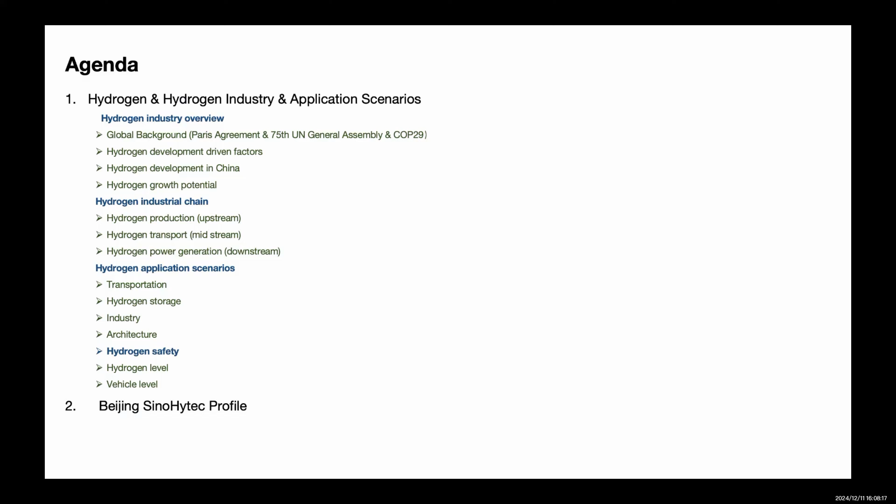In the third part, we will talk about hydrogen application scenarios, from transportation to hydrogen storage, from industry applications to architecture sector applications. Then we will focus on hydrogen safety at the hydrogen level as well as the vehicle level. And next, we will have a brief introduction of our company, Beijing SinoHytec.

So first, let's have an overview of the hydrogen industry. As we all know, it has been a global consensus that 35 countries and regions have issued hydrogen energy development roadmaps and actively support the hydrogen energy and fuel cell industry. For example, China rolled out the medium and long-term plan for the development of the hydrogen industry in 2022.

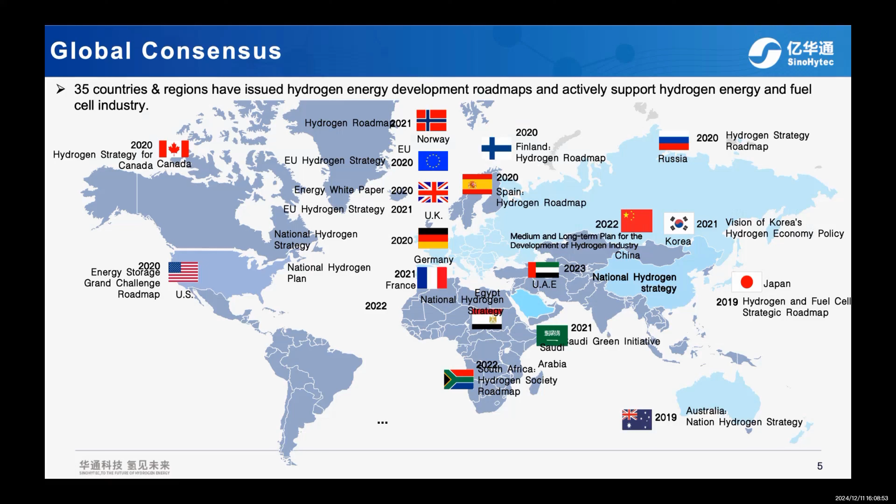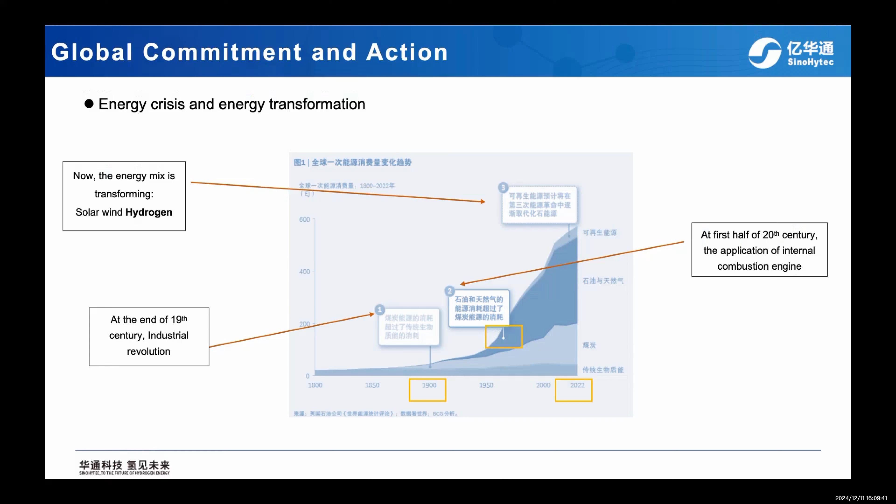We want to use more renewable energies like solar, wind, and hydrogen. Because of zero carbon emission and carbon neutrality policy, we must control temperature increase within 2 degrees Celsius compared to pre-industrial levels. If we continue at the current carbon emission level, it will surpass that, and the temperature increase will reach 2.6 to 3 degrees Celsius. If we follow the map set by the Paris Agreement, we can control the temperature increase within 2 degrees, below the red line.

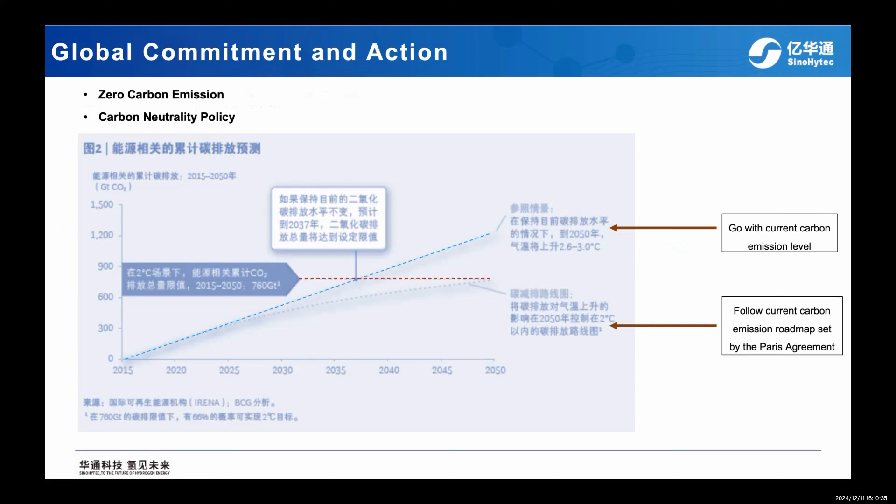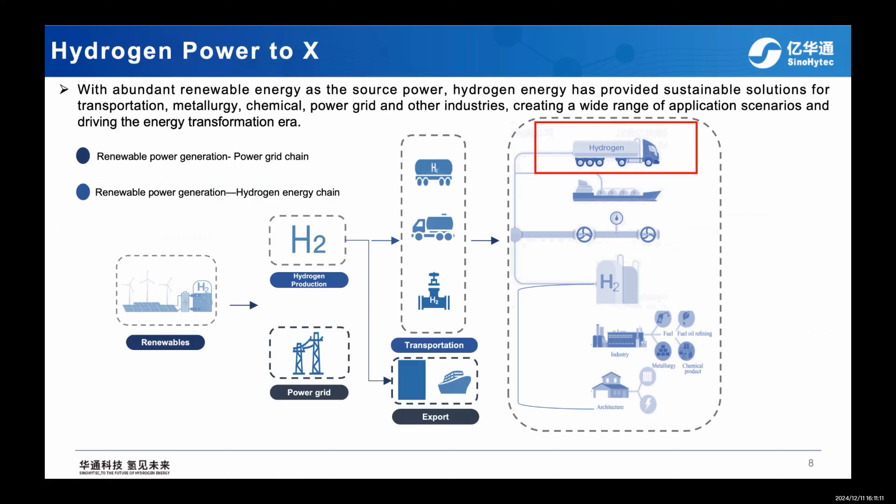So why hydrogen? Because hydrogen is power to X. With abundant renewable energy as the source power, hydrogen energy has provided sustainable solutions for transportation, metallurgy, chemical, power grid, and other industries, creating a wide range of application scenarios and driving the energy transformation era. We use hydrogen to power the power grid and also to power the transportation industry.

Also, from the market potential perspective, we can see from this picture that by 2050 the application of hydrogen will increase to 10 to 15%, and the mainly used sector is the industry sector.

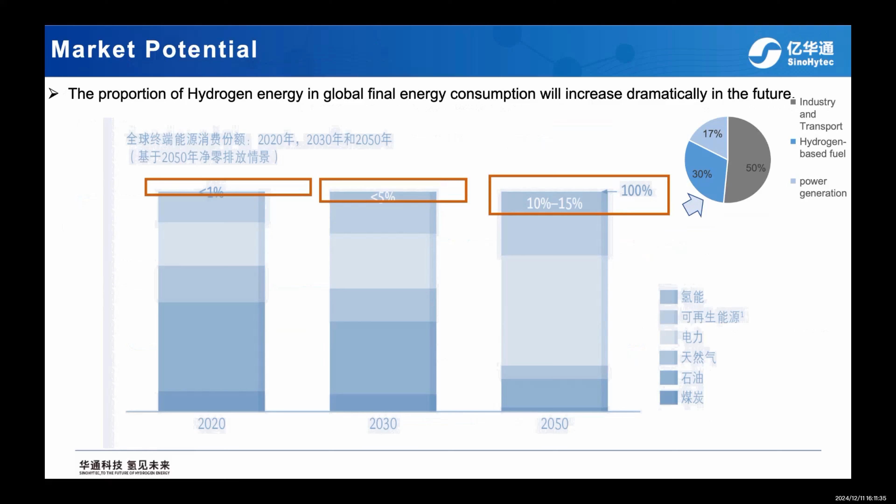So how about hydrogen development in China? There are several reasons that contributed to the quick development of hydrogen in China. The first is the favorable environment, because China is a large hydrogen producer and consumer. It's predicted that by 2030, hydrogen demand in China will reach 35 million tons, and by 2050 that figure will reach 60 million tons. The annual hydrogen production in China accounts for one-third of the world's total.

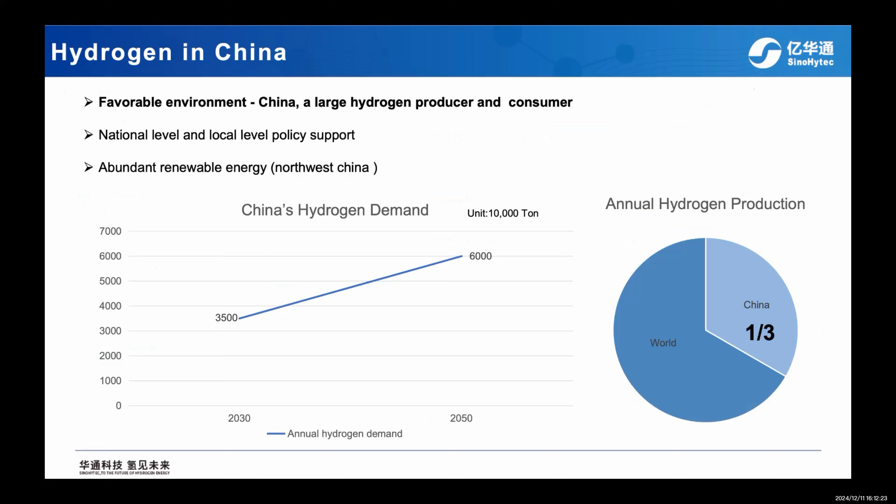The next reason is national and local level policy support. As mentioned, China rolled out the medium and long-term plan for the development of the hydrogen energy industry from 2021 to 2035. It states that by 2025, the number of fuel cell electric vehicles will be about 50,000. The amount of hydrogen produced from renewable energy will reach 100,000 to 200,000 tons per year, and CO2 reduction will reach 1 million to 2 million tons per year.

By 2030, a relatively complete hydrogen energy technological innovation system and clean energy hydrogen production and supply system will be established. By 2035, a hydrogen energy industry system covering transportation, energy storage, industry, and other fields will be in place, and the proportion of hydrogen production from renewable energy in final energy consumption will have increased significantly.

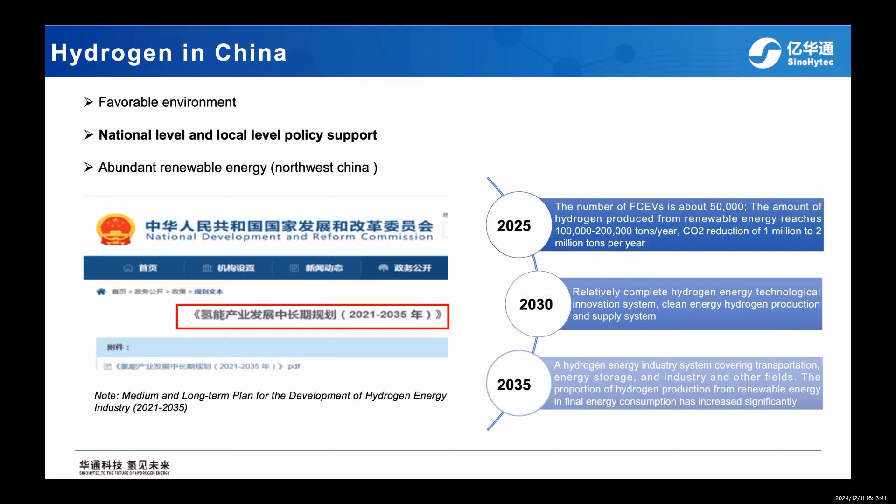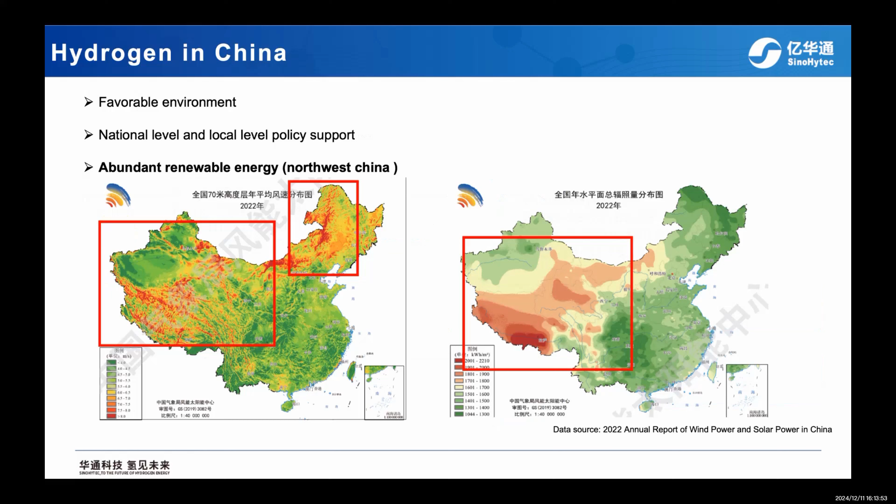The last reason is abundant renewable energy. From this picture, you can see that in northwest China there is abundant solar and wind energy. Next, we will focus on the hydrogen industrial chain.

For hydrogen production, we know there are 3 types of hydrogen: green hydrogen, blue hydrogen, and grey hydrogen. Grey hydrogen is mainly produced using oil, natural gas, fossil fuels, or coal. Blue hydrogen uses carbon capture technology, while green hydrogen uses renewable energies like solar and wind to produce hydrogen.

Data from 2020 shows that in China, the main source of hydrogen production is still coal, while in the world it is still natural gas. But it is predicted that water electrolysis will increase to 60%, and natural gas with carbon capture, utilization, and storage technology will increase to 40% by 2050.

Except for coal and natural gas hydrogen production, there is also coke oven gas hydrogen production and chlor-alkali to hydrogen production. These are all grey hydrogen. So far, fossil fuel-based hydrogen production is still the mainstream in China, while water electrolysis stands as a promising industry for the future.

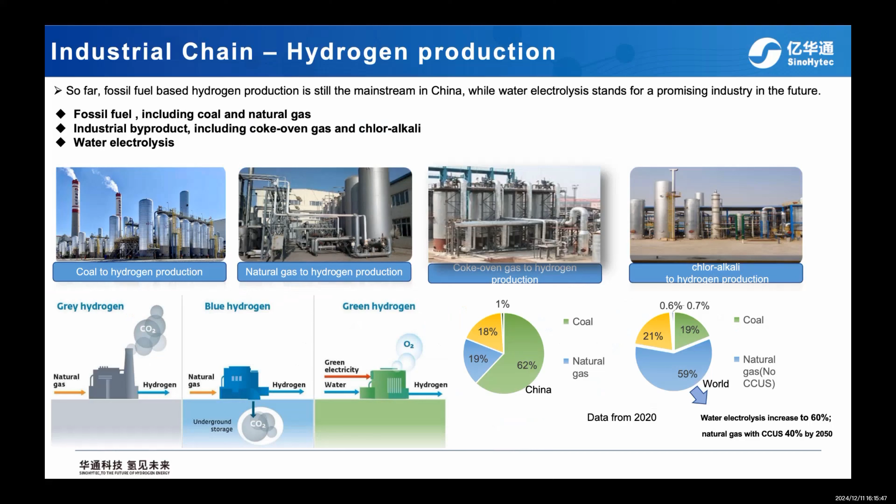There are several ways of hydrogen production. Alkaline water electrolysis is a more developed technology, low cost, and large scale application, but it still needs stable power supply. PEM water electrolysis has flexible operation, small size, high output pressure, and uses renewable energy. But its disadvantages are that it uses precious metal as the catalyst and is also limited by the supply chain.

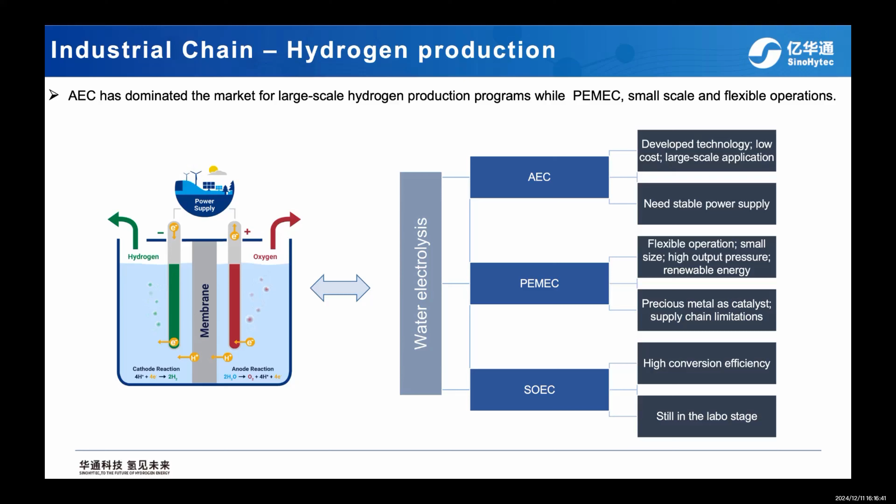And for SOEC, it has a high conversion efficiency, but is still in the lab stage.

For hydrogen transportation, there are mainly three types: long tube trailers, pipelines, and tank vehicles. Based on different status and hydrogen delivery ways, there are several types of hydrogen, like gaseous hydrogen at 35 megapascal or 70 megapascal.

The pros are it is quite a developed and efficient technology, has lower cost, and is very easy to operate. But the cons are it's very flammable with safety concerns, has high requirements for hydrogen refueling, operation, and the surrounding environment, and also has hydrogen storage intensity issues.

For liquid hydrogen, it has to be cooled to temperatures below minus 253 Celsius degrees, and is mainly used in the aerospace sector. The cons are it's very dangerous to handle, requires strict storage conditions, and uses higher energy consumption.

For methanol and NH3, it has low conversion efficiency, is toxic, and has higher energy demand. For LOHC, it has high energy storage density, easy transport, but has gas impurities, difficult dehydrogenation, requires catalyst, and has a high working temperature.

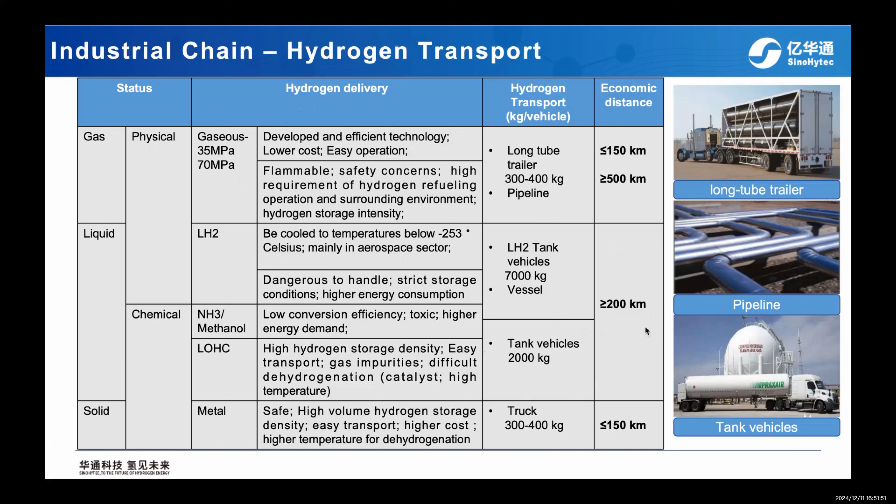Based on different types of hydrogen, there are different transport ways. Gases use long tube trailers, with economic distance less than 150 kilometers. Pipelines have economic distance more than 500 kilometers. Tank vessels for liquid transportation can carry 7,000 kilograms, with economic distance more than 200 kilometers. For the metal one, the economic distance is less than 150 kilometers.

Next, hydrogen to power. Globally, SOFC and PAFC have been widely applied, while in China, PEM fuel cells with quick startup have been widely used in small-scale distributed home-based scenarios, and have been improved from kilowatt level to megawatt level development. The comparison can be seen as follows.

We can see the advantages of PEM fuel cell are that the working temperature is much lower, from 80 to 100 Celsius degrees, and the startup time is much lower than others, less than 1 minute. From the application scenarios, the PEM fuel cell can be primarily used in passenger vehicles and commercial vehicles.

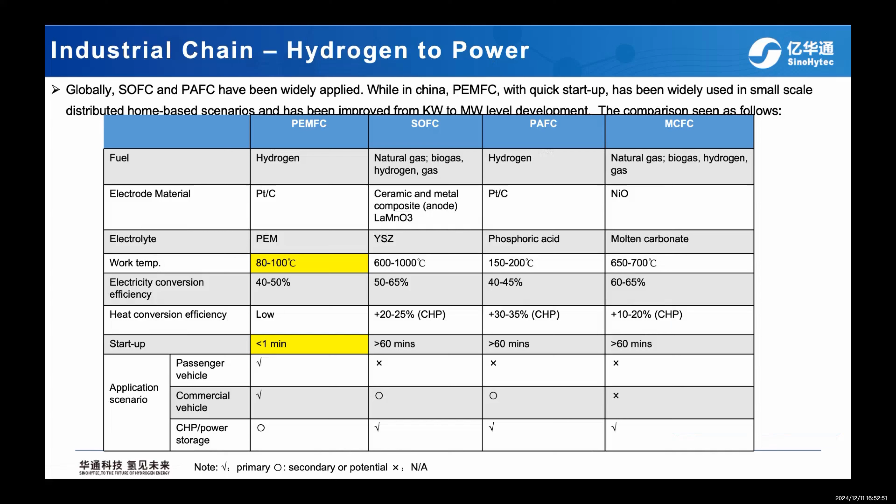There is a summary of the pros and cons. For the PEM fuel cell, the pros are it has high power intensity, light and small size, long service life, and quick cold start. The cons are it's difficult to process and needs special fuel.

For the SOFC, the pros are it has high conversion efficiency, no precious metal catalyst, and fuel compatibility. The cons are it has high temperature, easy corrosion, and low startup with short service life.

For the PAFC, it's a quite developed technology that has entered the commercial stage, with fuel impurity tolerance. The cons are it has large size, lower efficiency, short service life with strong corrosion of electrolytes, and needs precious metal as catalyst. For the MCFC, the pros are high efficiency and fuel compatibility, but the cons are high working temperature, corrosion of electrolytes, and low startup with short service life.

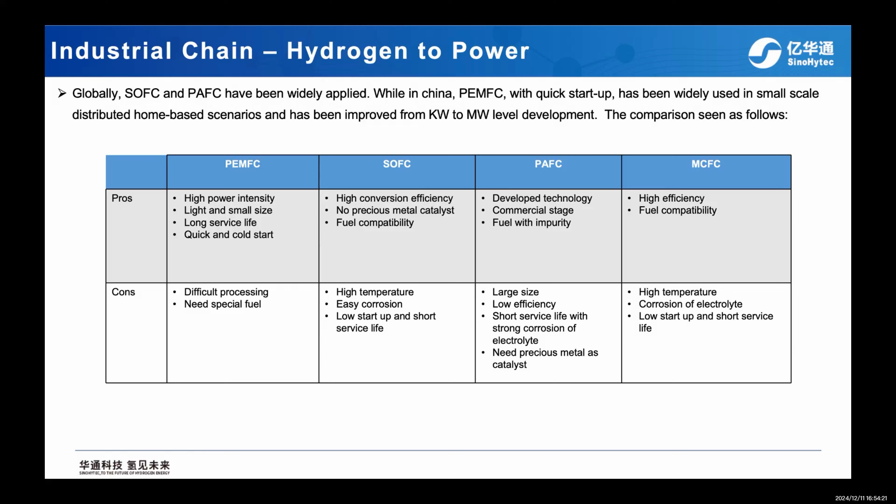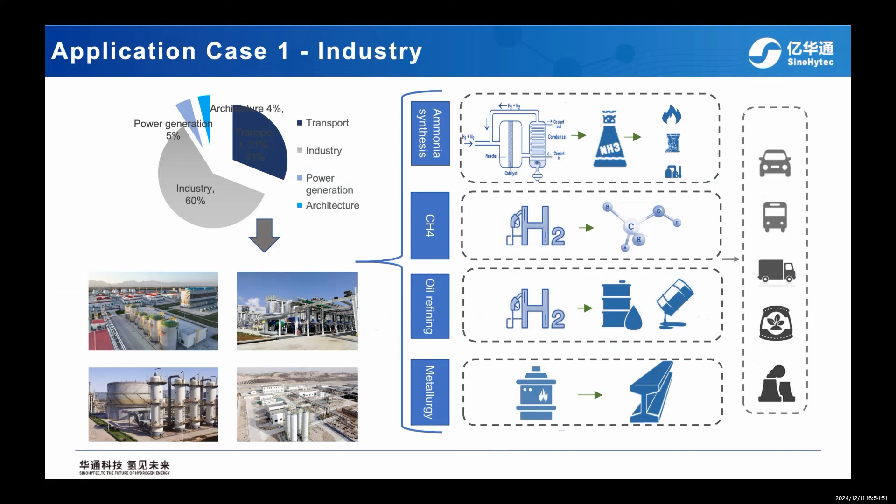For the third chapter, we will focus on hydrogen applications. The primary application is the industry sector. From this chart, we can see more than 60% of hydrogen utilization is in the industry sector. From ammonia synthesis to oil refining to metallurgy, all use hydrogen.

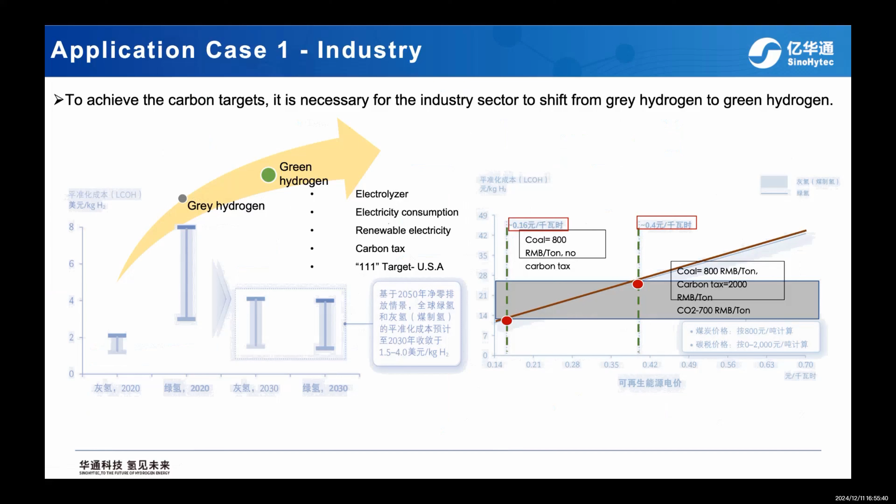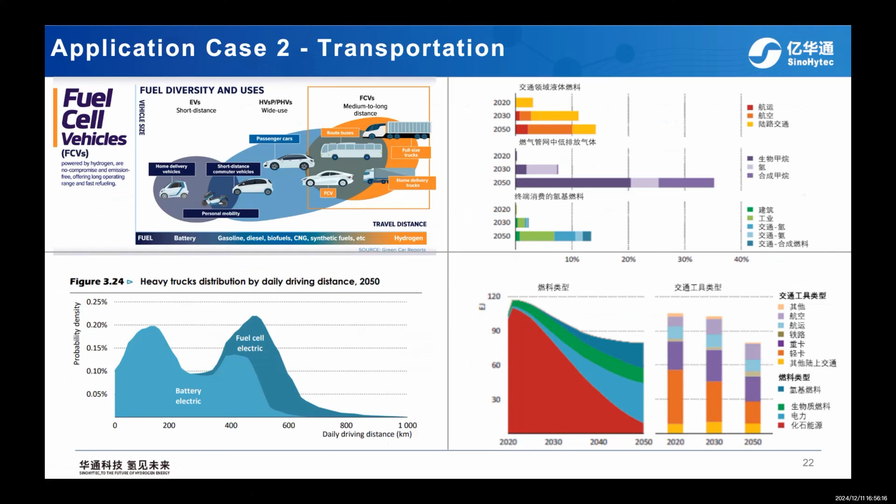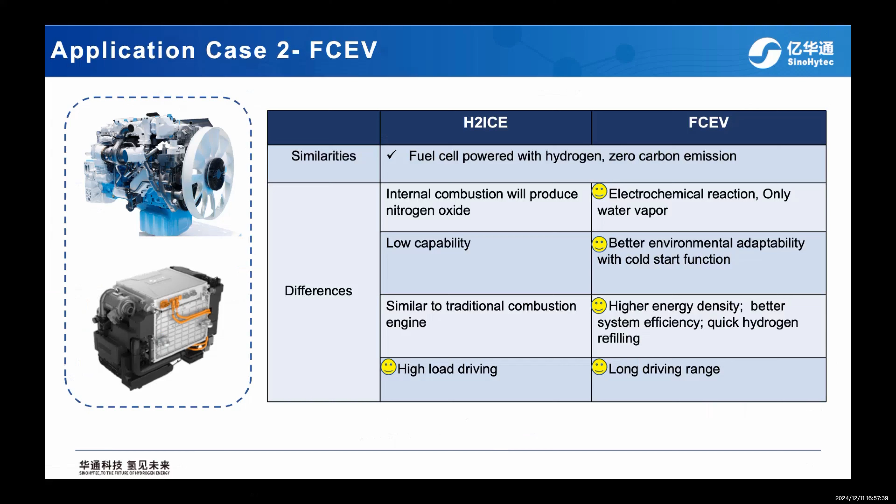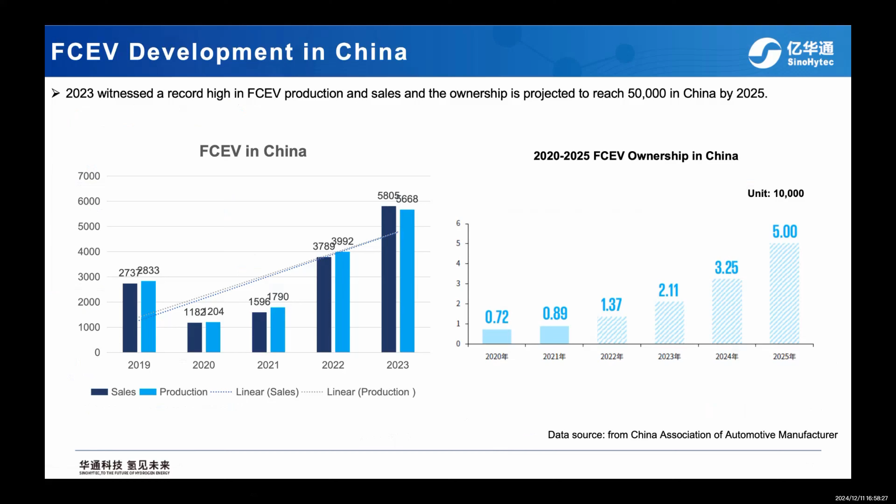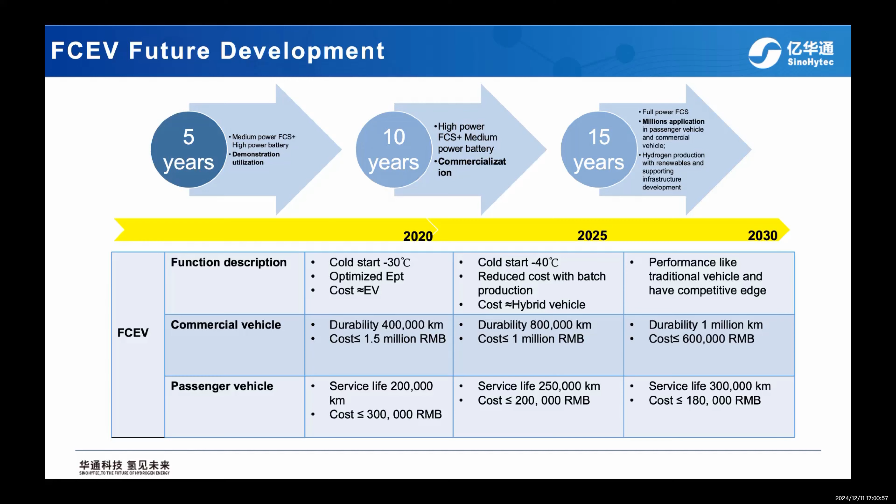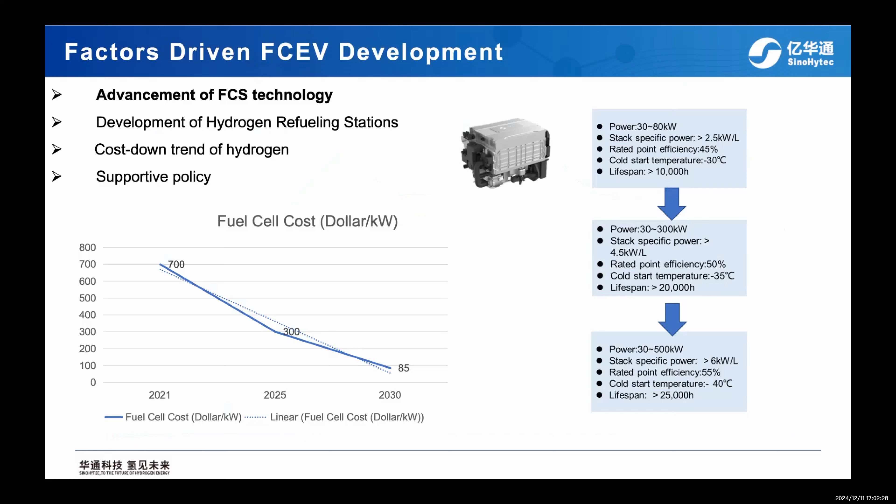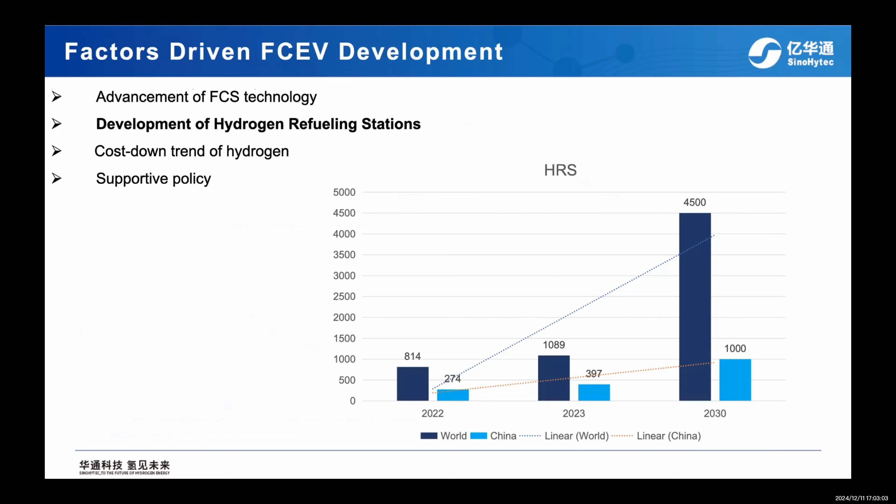Another reason is the development of hydrogen refueling stations. From this chart, the number of hydrogen refueling stations in China and the world shows an increasing trend. In 2030, there will be more than 1,000 hydrogen refilling stations in China and more than 4,500 globally. Right now in 2024, there are more than 500 hydrogen refilling stations in China.

The next reason is the cost downtrend of hydrogen. For now in China, hydrogen costs 40 to 70 RMB per kilogram, while in Japan, the US, and the EU, it costs about $10 per kilogram. In 2030, it's projected that hydrogen will be 20 RMB per kilogram in China, and China will also become a great supplier to America and the EU.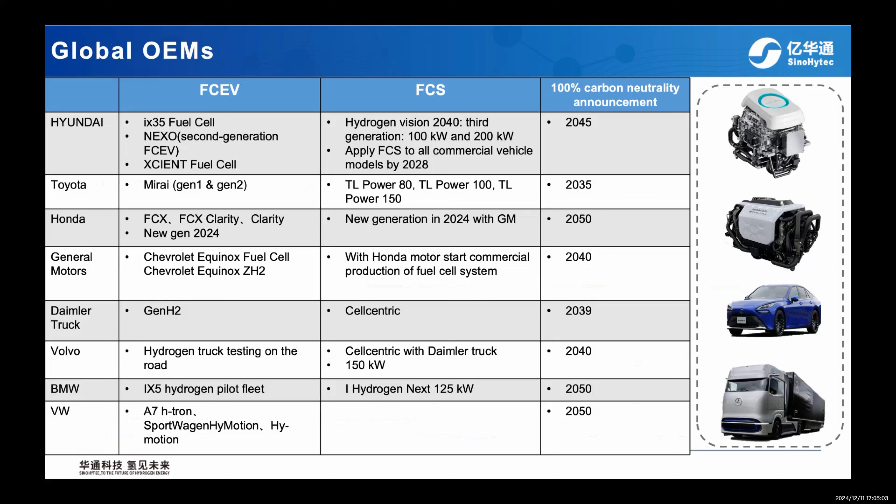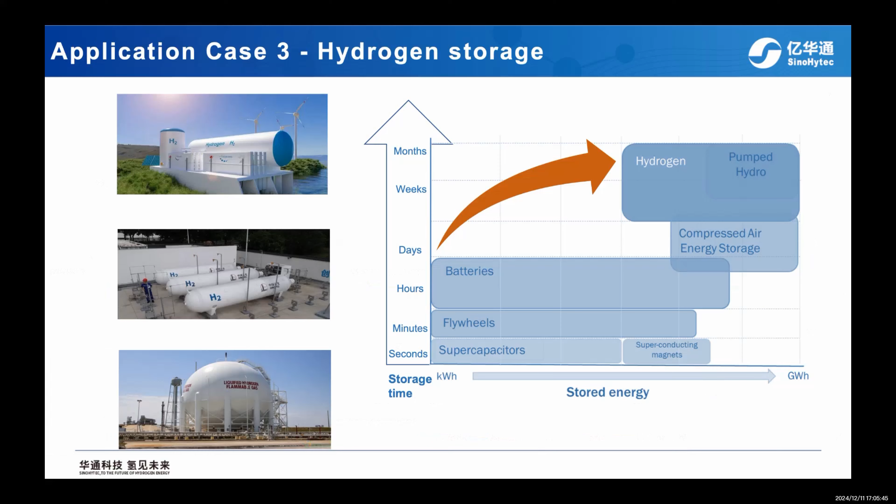The next application scenario is hydrogen storage. Compared to batteries or super capacitors, which only store energy for seconds, minutes, or hours, with hydrogen the storage time increases, and the stored energy also increases from kilowatt hours to gigawatt hours. So there's a network from hydrogen production to hydrogen storage, then transport from the power grid to hydrogen refilling stations, to the industry sector, and to the stationary power grid—from power generation to power grid to power usage.

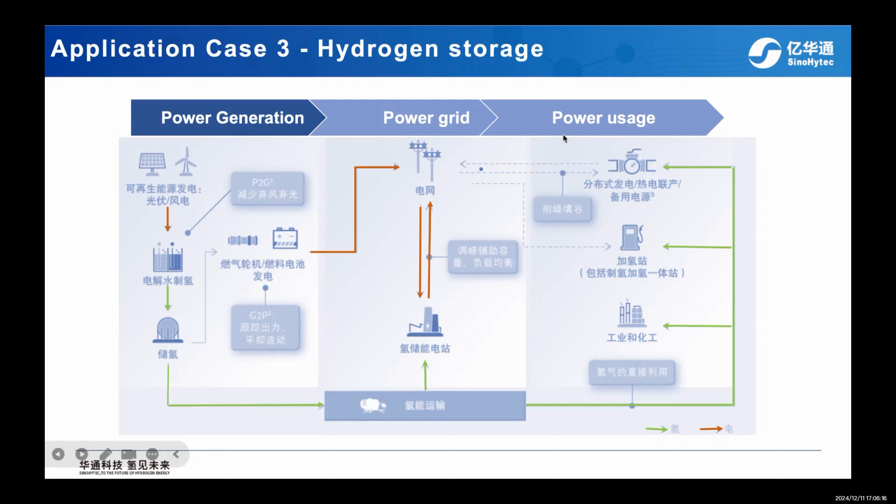The last application case is the architecture sector. Stationary power generators, or SPGs, can be applied to a wide range of scenarios such as hospitals, supermarkets, factories, hotels, apartments, villages, and islands, with a 2 megawatt system for megawatt-level solar and wind power storage. The stationary power generator has many features, including higher efficiency—the system's maximum efficiency is more than 58%, and the combined efficiency is more than 85%.

Besides that, it's very clean—green, zero emission, and zero pollution. It has high adaptability, with a temperature range from minus 35 degrees to 55 degrees, and a utilization altitude of 3,000 meters. It also has long durability, with an operation life of 40,000 hours and a standby time of 15 years.

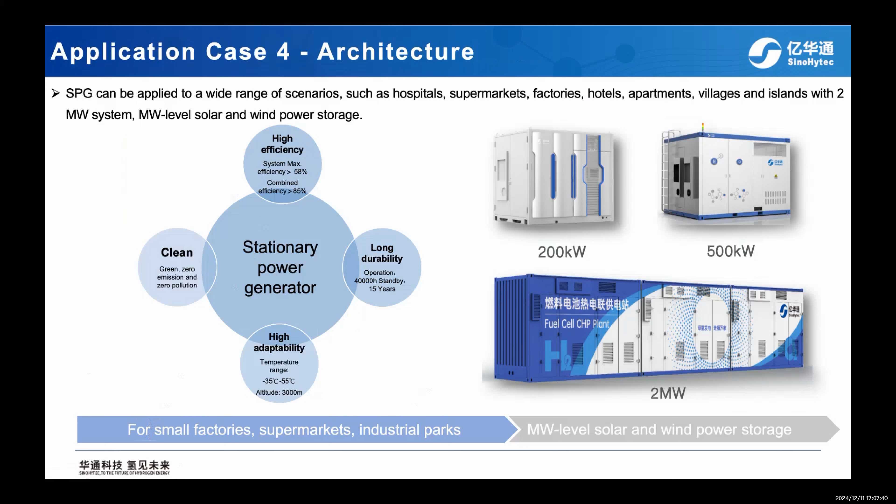Last, we will talk about hydrogen safety. From the physical level, hydrogen is colorless, tasteless, odorless, and very light. From the chemical perspective, its explosion limit compared to gasoline or gas is higher, ranging from 4.1 to 75, and its diffusibility is also higher than gasoline and gas, so it's not that easy to explode.

But with that, we still have to care about hydrogen safety and take measures. From the intrinsic safety perspective, we care about hydrogen's features, like being colorless, odorless, flammable, and explosive. At the material level, we can prevent hydrogen embrittlement; at the structure level, we can address strength concentration; and at the production level, we guarantee there are no production defects.

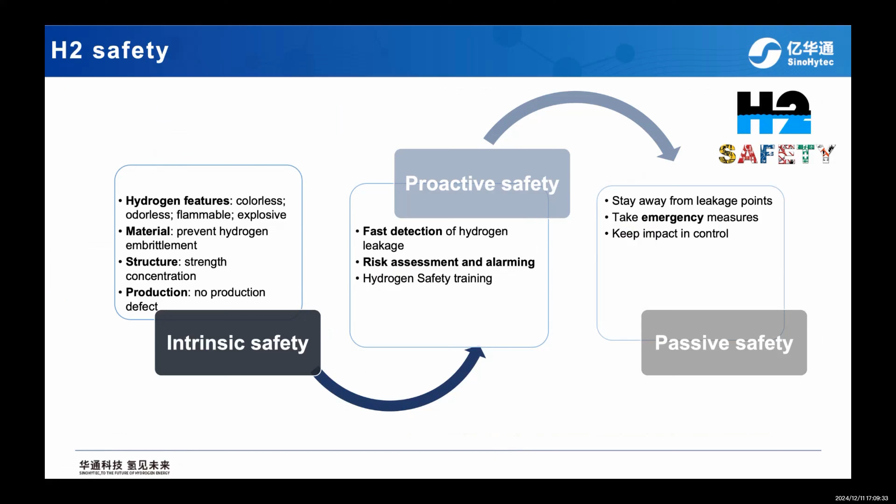For proactive safety, we can ensure fast detection of hydrogen leakage, conduct risk assessment and alarming, and provide hydrogen safety training. Passive safety measures include staying away from leakage points, taking emergency measures, and keeping impact under control.

From the vehicle level, we still have ways to ensure vehicle-level hydrogen safety. There are V-shape measures, from vehicle design to system-level design to component-level design, and from this set there is vehicle-level verification, system-level verification, and part-level verification.

At the vehicle design level, we have vehicle hydrogen leakage requirements, vehicle integration layout requirements, safety requirements for vehicle hydrogen exhaust, vehicle high voltage safety requirements, and vehicle troubleshooting requirements.

At the system level design, we have release safety requirements, ventilation safety requirements, static safety requirements, system architecture security requirements, as well as system software security protection.

For the component level, we ensure material safety requirements, sealing safety requirements, safety requirements for extreme working conditions, and insulation protection safety requirements.

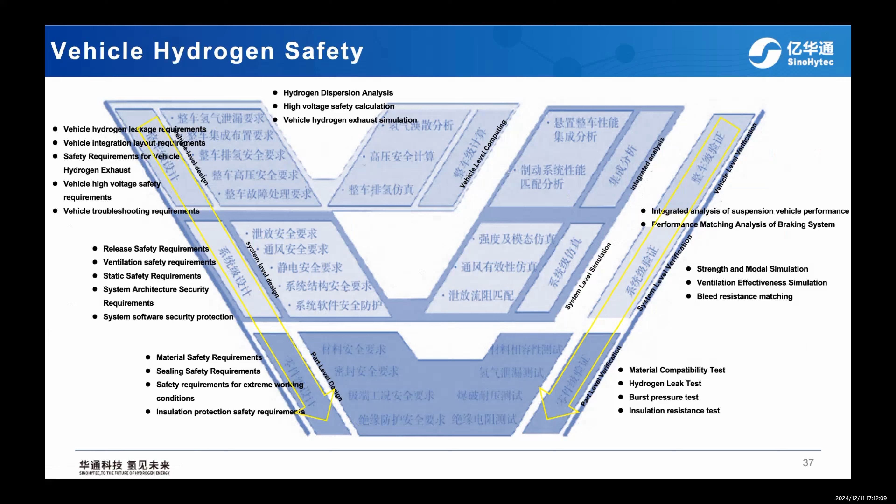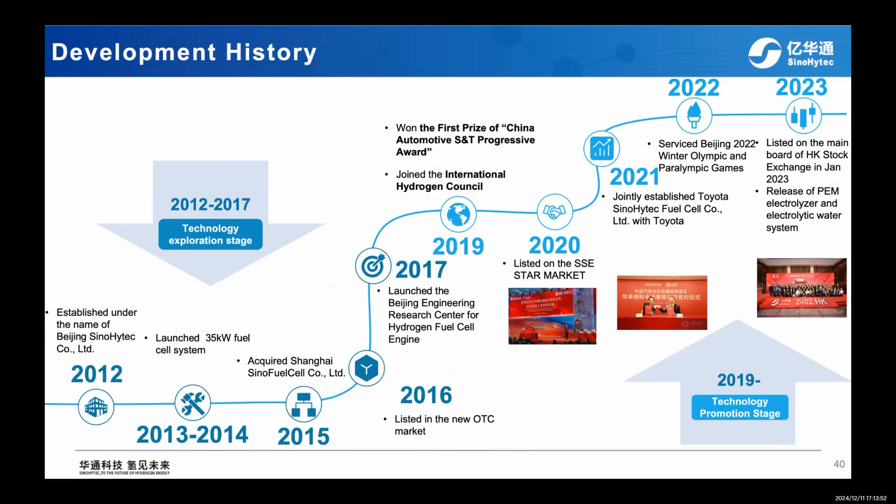After over 10 years of exploration and development, SinoHytec has expanded its business layout. The main line is SinoHytec, focused on the fuel cell system. Our subsidiary, Shanghai SinoFuelCell, focuses on the stack level, and there's also SinoHytec Hydrogen Technology, focused on the PEM electrolyzer.

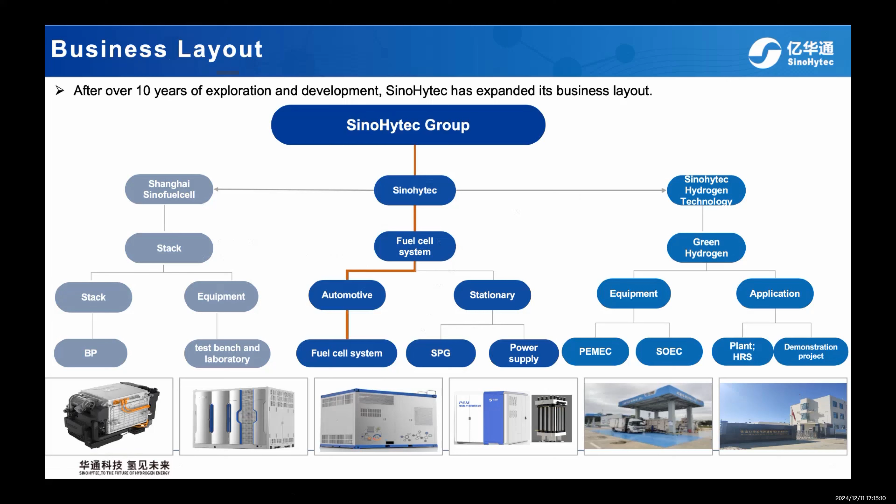SinoHytec is a national high-tech company focusing on the R&D and industrialization of hydrogen energy and fuel cell systems. As a pioneer, the company has formed an internationally advanced and domestically leading product system of hydrogen fuel cell systems. The company has emerged as the first fuel cell company listed on both A+H stock exchanges.

Our company was founded in 2012. Our staff numbers over 1,000, and the revenue is more than 740 million. We are number one in comparable market share.

From the technology and product perspective, our R&D and investment in 2022: the company's R&D, production, sales, and other business basically remained stable and achieved a revenue of 738.11 million RMB during the reporting period, and R&D investment accounts for 21.65% of the revenue, showing an upward trend.

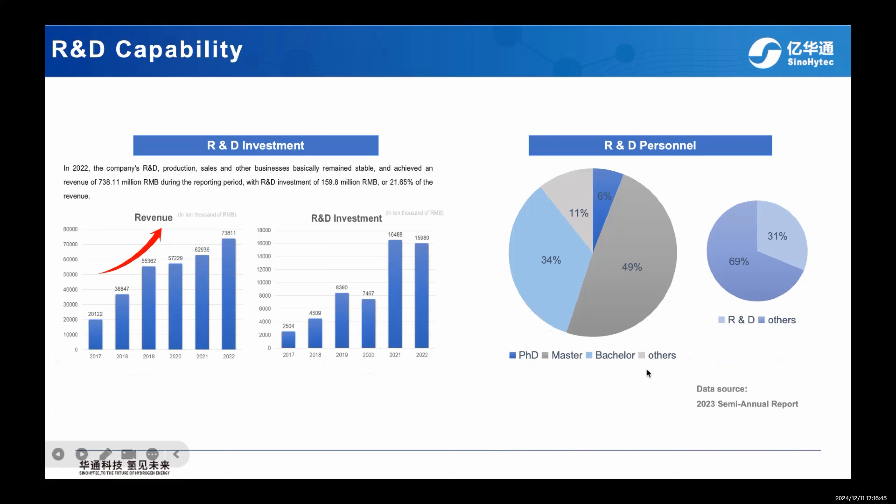And this is the structure of our R&D personnel.

For our system, this is the world's first more than 200 kilowatt single system vehicle fuel cell system, and it has a quick response, higher reliability, high economy, and high integration. The rated power is 241, for the 240 kilowatt model, and the density is 757. The cold start temperature is -35, and the peak energy conversion efficiency is 58.

There is also the PEM electrolyzer, which is also at a world-leading level in terms of economy, safety, dynamic response, and environmental capability.

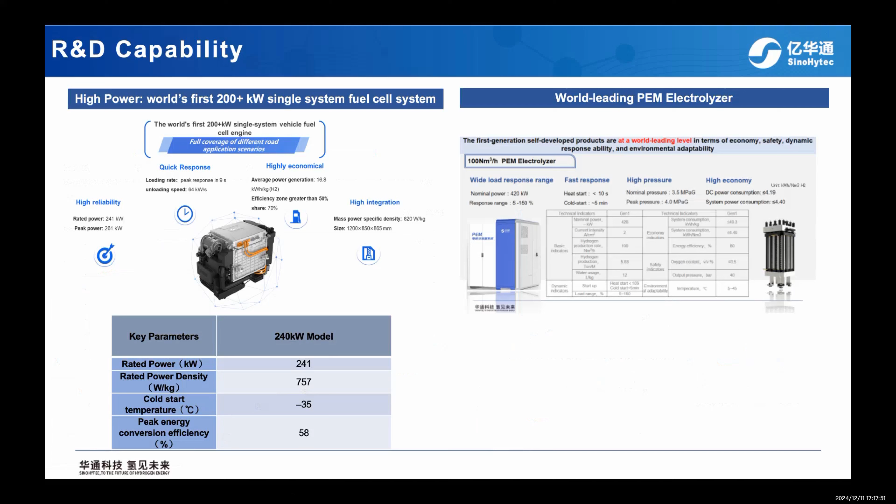For our fuel cell system, the 30 kilowatt to 240 kilowatt power range realizes full coverage of land transportation application scenarios.

The stack has independent R&D capability, achieving -35 Celsius degree low temperature startup and -40 Celsius degree low temperature storage. It has a highly integrated and modularized design, very space saving, easy maintenance, and low maintenance costs. It also has remote intelligent monitoring and diagnostic technology, enabling real-time monitoring of operation status and real-time intelligent diagnostic data.

This is from 2014, basically the 30 kilowatt fuel cell system. After more than 10 years of exploration and development, in 2022 we launched the first more than 200 plus kilowatt fuel cell system, our 240 kilowatt fuel cell system.

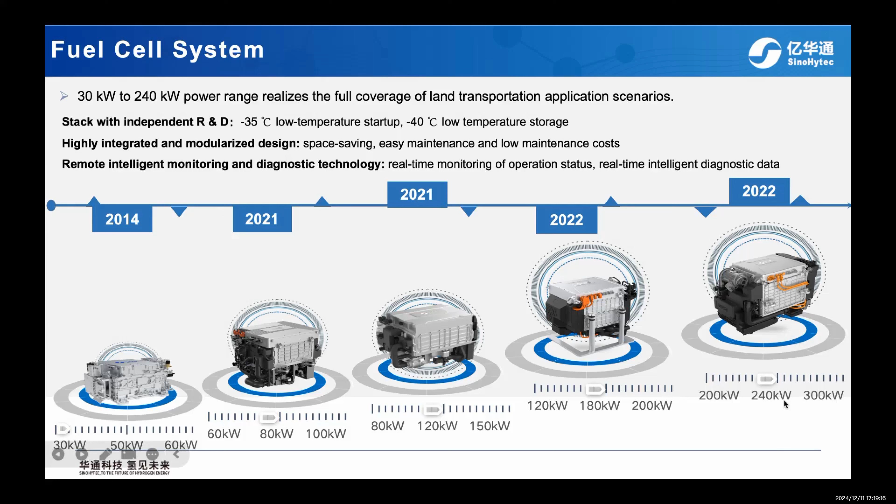This is the product introduction of the PEM electrolyzer. It has a wide load response range. The nominal power is 420 kilowatts, and the response range is from 5 to 150%, with faster response and lower cost. It also has high pressure and high economy.

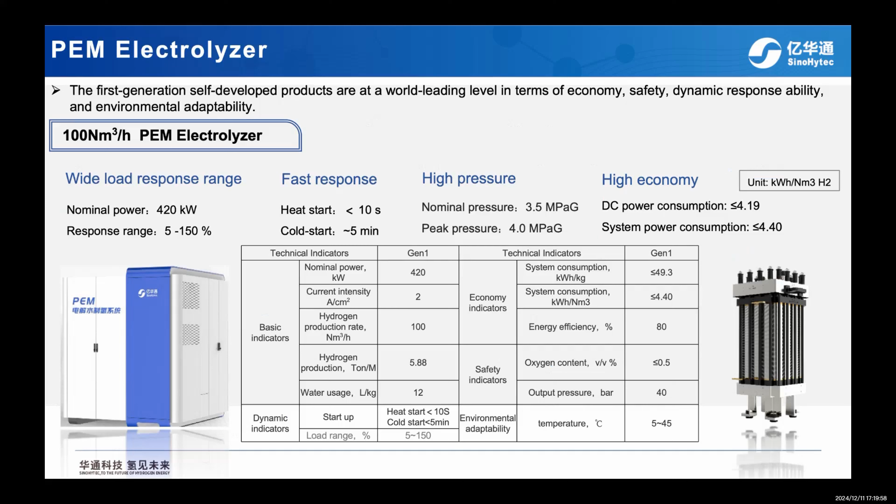Next is the product of the stationary power generator. The 200 to 500 kilowatt stationary power generator can be applied to a wide range of scenarios, such as hospitals, supermarkets, factories, hotels, and apartments.

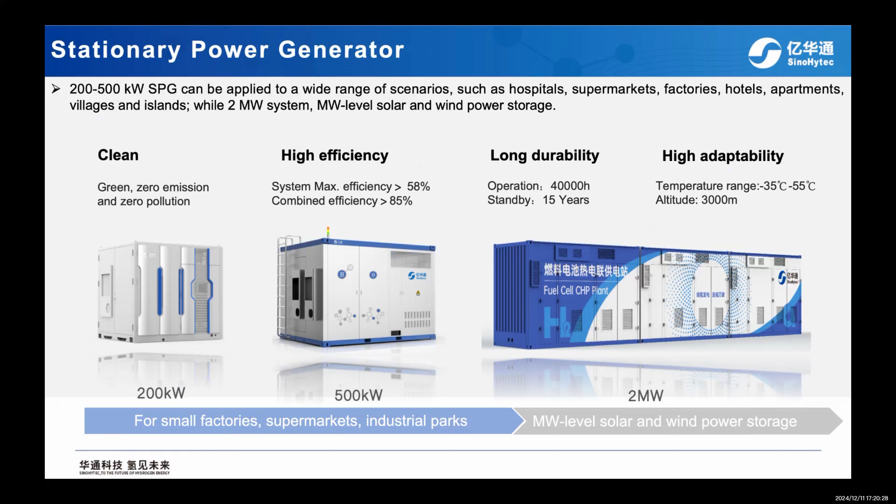Besides the R&D capability, we also have leading testing capability. We have the system-level test bench, the environmental chamber, immersion tank, and rolling tables to test fuel cell systems. Besides that, we also have EMC test, waterproofing test, damp heat test, cold start test, salt spray test, noise test, vibration test, and durability test for our products.

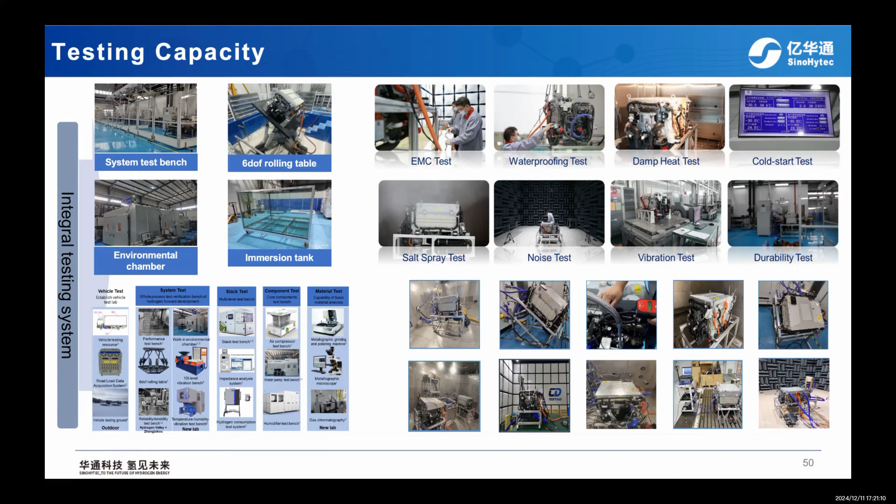As for our production capability, in order to meet the rising demand for hydrogen fuel cell systems in the domestic new energy vehicle market, SinoHytec has expanded its production capability ahead of schedule and completed the layout of its production plants. We have two production bases, one in Daxing District, Beijing, and another in Zhangjiakou, Hebei province. The one in Daxing has an annual capability of 3,000 units, while Zhangjiakou has 10,000 units, and the combined production capability is a maximum of 3 gigawatts.

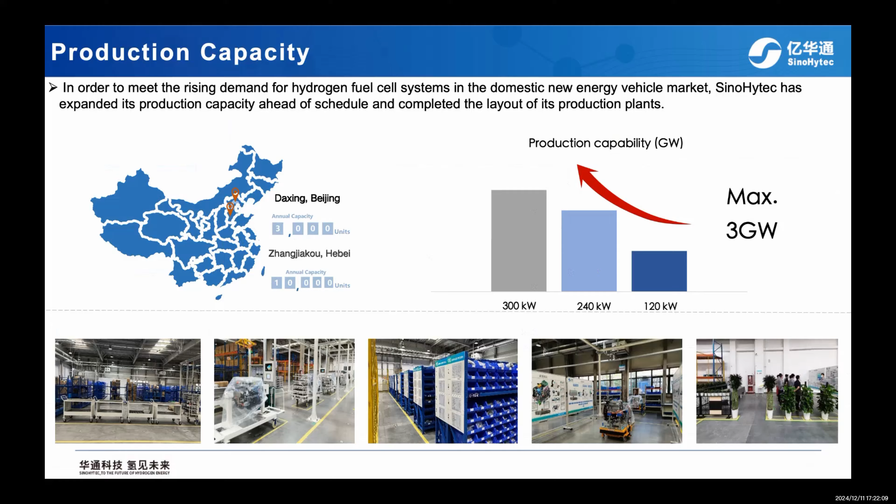Next part is about the commercialization.

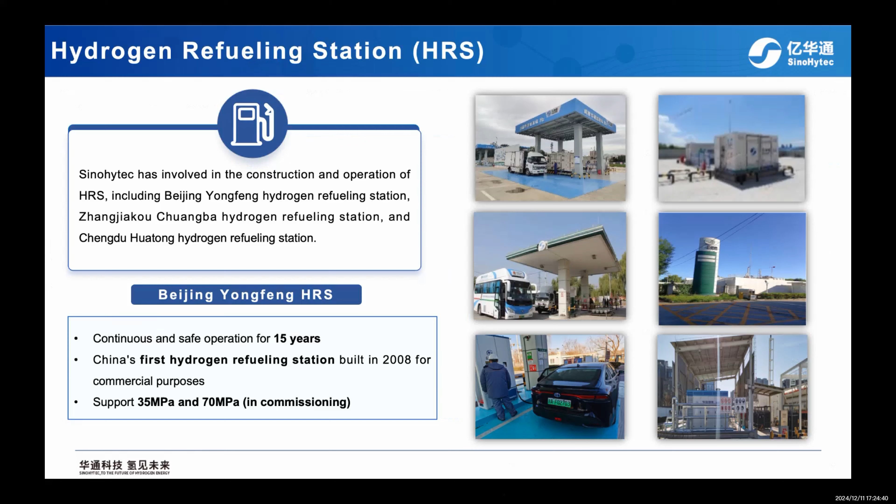Besides that, we also have rich operation experience. As of now, SinoHytec has provided power solutions to over 5,000 fuel cell vehicles operating on the road in China, with a cumulative operating distance of over 200 million kilometers.

This is our operation in these cities. Our after-sale service support stations also cover most places and cities in China. After-sale services include 7x24 hours hotline support, all-weather fault diagnosis, repair service with supply of vulnerable parts, regular vehicle inspection and technical training, remote technical support, and background vehicle operation monitoring.

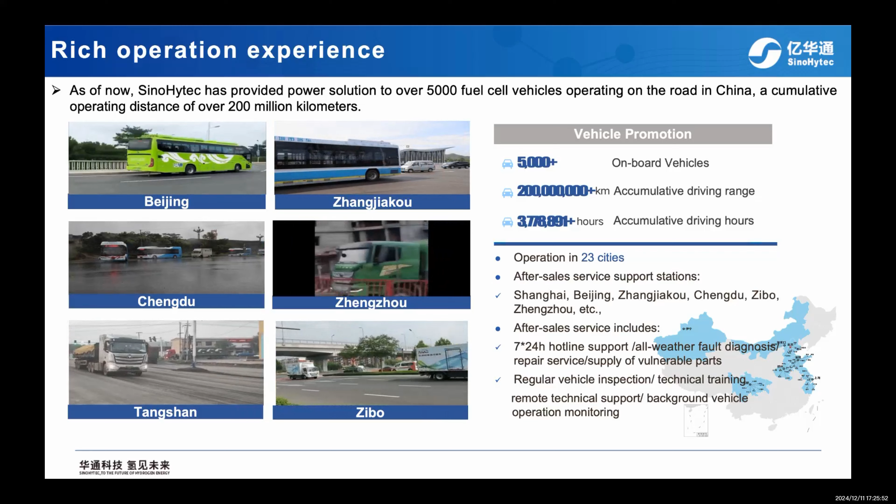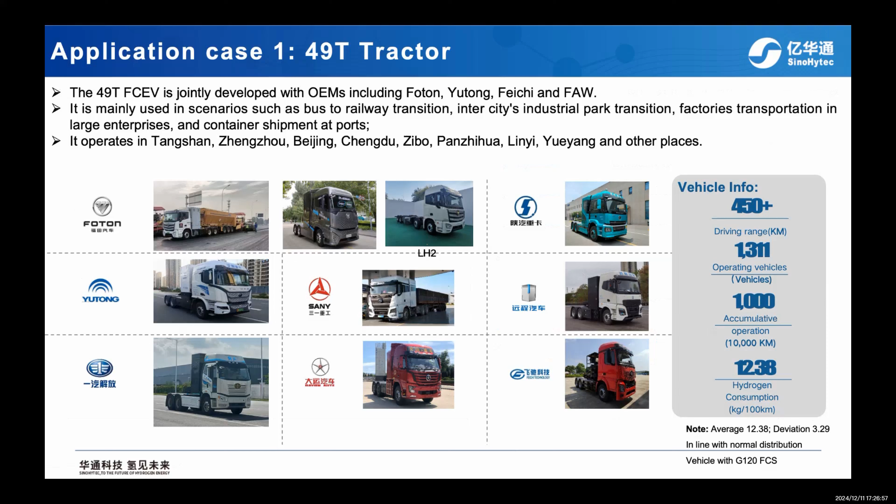For the application case, the first one is the 49-ton tractor. The driving range is more than 450 kilometers, and the operating vehicles now number more than 1,311, with cumulative operation of more than 10 million kilometers. This fuel cell electric vehicle is jointly developed with Chinese OEMs including Foton, Yutong, Feichi, and FAW. It's mainly used in scenarios such as bus-to-railway transition, intercity transport, industrial park transition, factory transportation in large enterprises, and container shipment at ports. It operates in many Chinese cities, including Beijing, Chengdu, Zibo, and other places.

Next application case is the 31-ton dumper. The driving range is more than 400 kilometers, the operating vehicles number more than 360, and cumulative operation is more than 11 million kilometers. Hydrogen consumption is 12.33 kilograms per 100 kilometers. This 31-ton fuel cell powered dumper is jointly developed with Chinese OEMs Foton, Yutong, FAW, and Shaanxi Automobile. It's mainly used in construction site transportation and operates in Beijing, Zhengzhou, and other places.

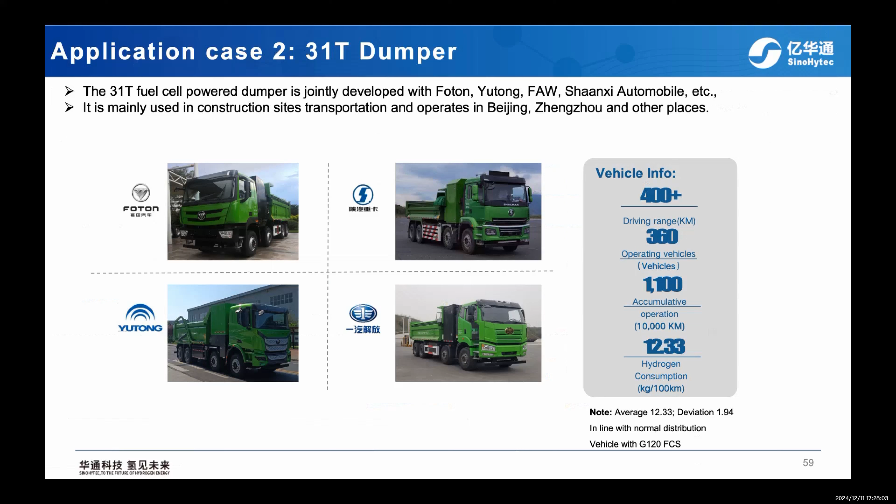The next application case is a 4.5-ton refrigerated vehicle. The driving range is more than 350 kilometers, the operating vehicles now number 926, and cumulative operation is more than 10 million kilometers. It's mainly used in urban and suburban cold chain logistics and transportation scenarios, operating in many Chinese cities and working for logistics companies such as Jingdong, Shunfeng, and Cainiao.

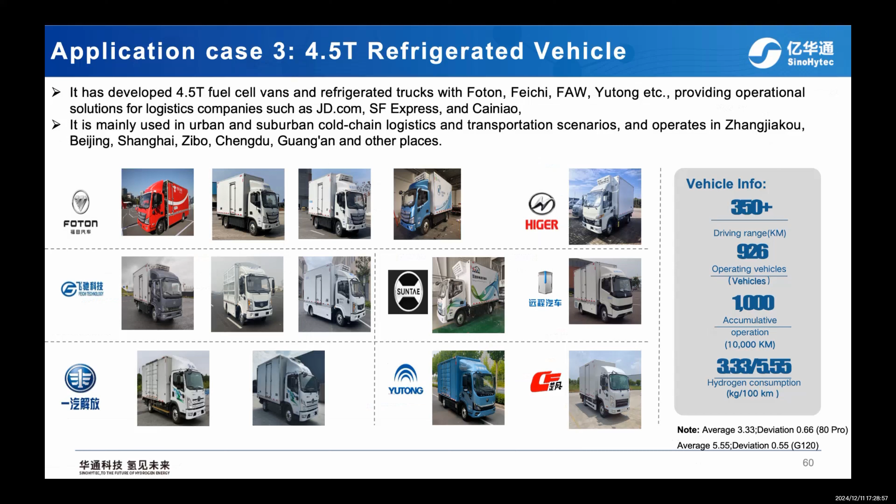Next is the 12-meter bus, which also served in the 2022 Winter Olympics. Over 1,200 fuel cell electric vehicles served in the 2022 Beijing Winter Olympics, 724 of which are equipped with Beijing SinoHytec fuel cell systems, successfully empowering the transportation work. It achieved a cumulative carbon reduction of 500 tons, with cumulative operation of 1.098 million kilometers and cumulative operation hours of 40,749. It achieved safe and smooth operation in -30° conditions, at an altitude of 2,198 meters and on slopes of 16°.

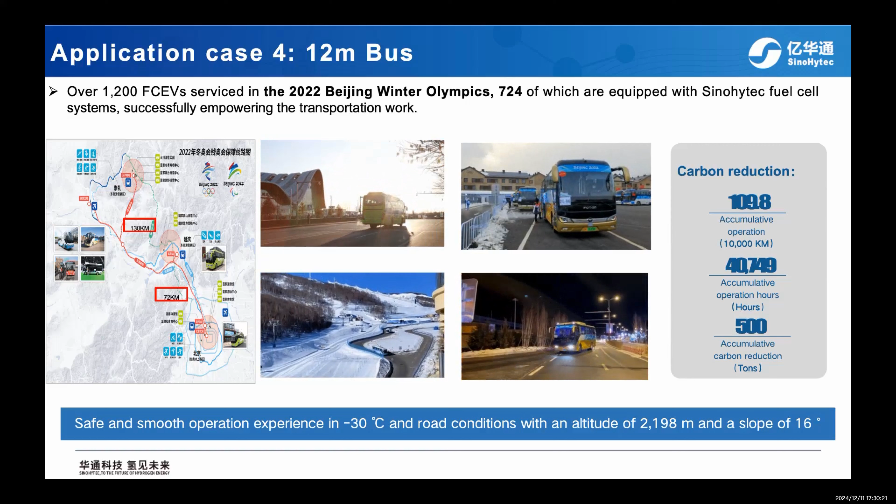This is basically a brief introduction of the hydrogen industry and hydrogen development in China, as well as a brief introduction of our company, Beijing SinoHytec. That's all. Thanks for your time and listening.